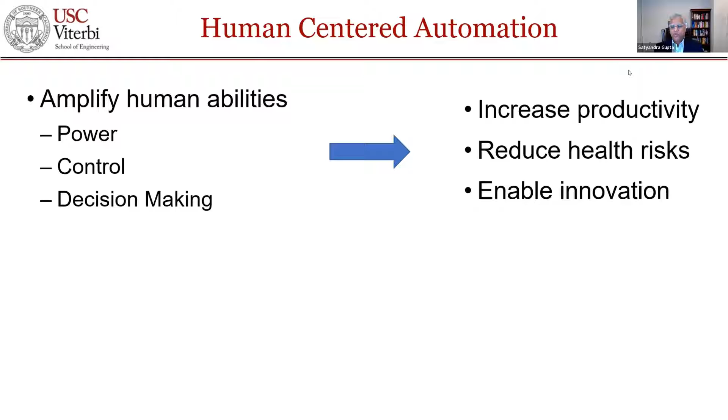So the field that I work in is basically called human-centered automation. The idea is that we want to use robotics and automation technology to amplify human abilities, in terms of power, control, and decision-making. If we can enhance human capabilities, then we can increase productivity, reduce health risks, and also enable innovation. So that's roughly the theme behind human-centered automation.

I believe that every problem can be solved with the right team, and we are now beginning to look at the following notion of team. We will have humans — we strongly believe humans are going to be a critical part of every team we imagine. Then there will be robotics, the hardware, which enables or makes humans more capable. And then there is the AI piece, which enhances humans' decision-making capabilities. So it's a combination of human, robots, and AI, which together can help improve quality of life for everyone. That's the vision with which we are working.

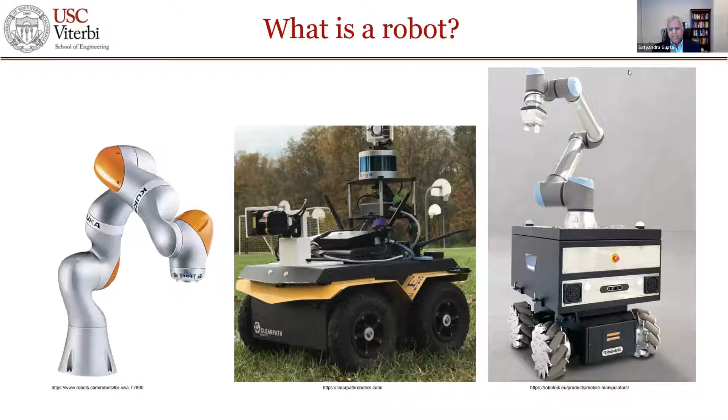So the first question I get asked is, what is a robot? In general, people would say there are two kinds of platforms out there traditionally called a robot. One would be a robotic arm, mounted on a table or some other workstation. Then there'll be a mobile platform, which may be carrying sensors and moving around. Increasingly, we see platforms where a robot arm is mounted on a moving platform. So this is what, in general, will be referred to as a robot.

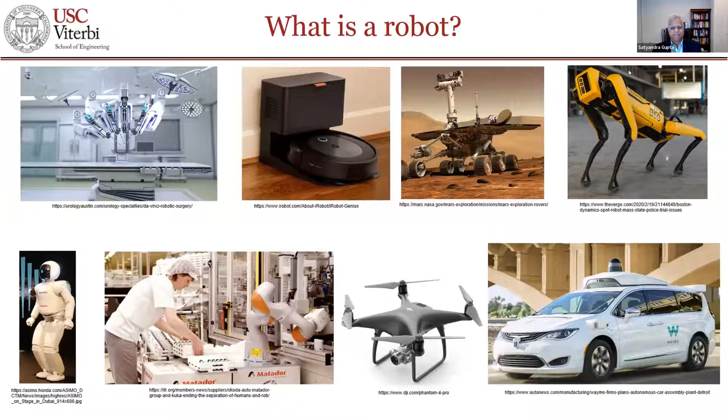Before I get into the main discussion point, I just wanted to show you some videos of the different kinds of robots which are built by my research group.

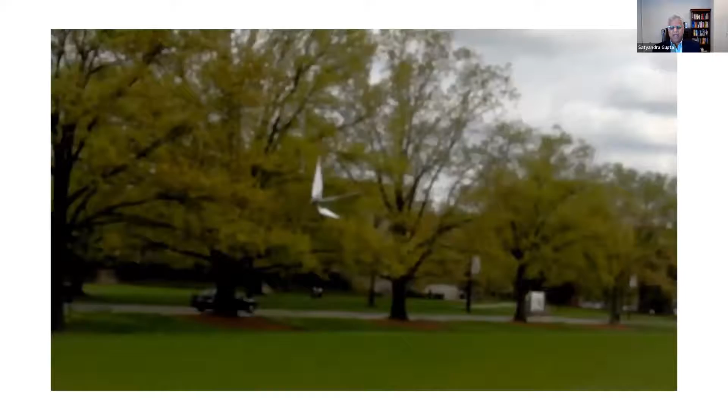The first robot I want to show you is this flapping wing robot. We got involved in building these flapping wing robots in 2005. The idea was that if you can build a platform which flies by flapping its wings, then you can have much quieter flight than what a rotary wing vehicle can provide. Also, these platforms are significantly more maneuverable, so you get much better performance than you get out of fixed wing flight. We have done lots of flapping wing platforms over the years.

We have also worked on robotic fishes. Here the idea is to build a small scale platform which can actually swim like a fish.

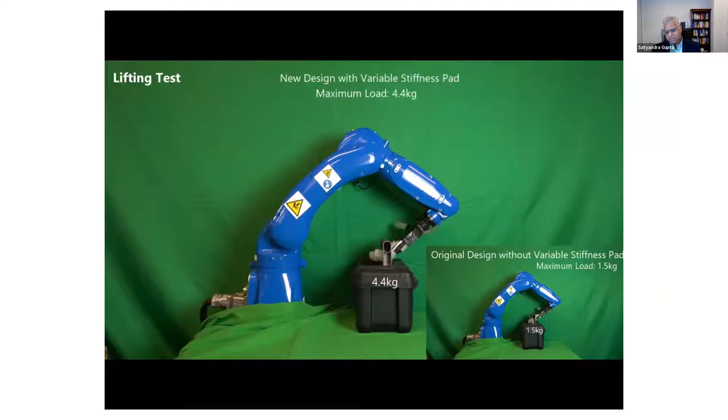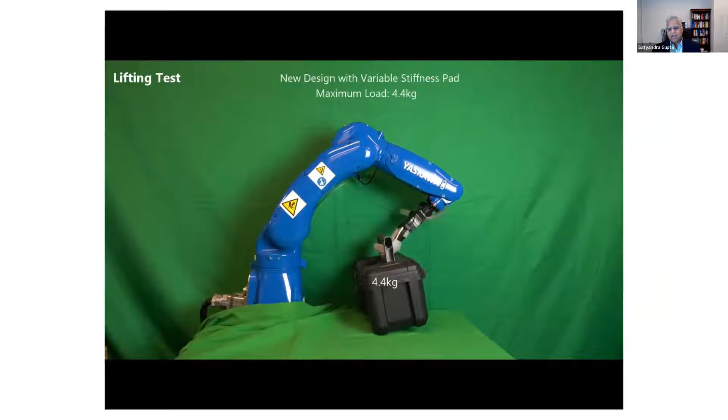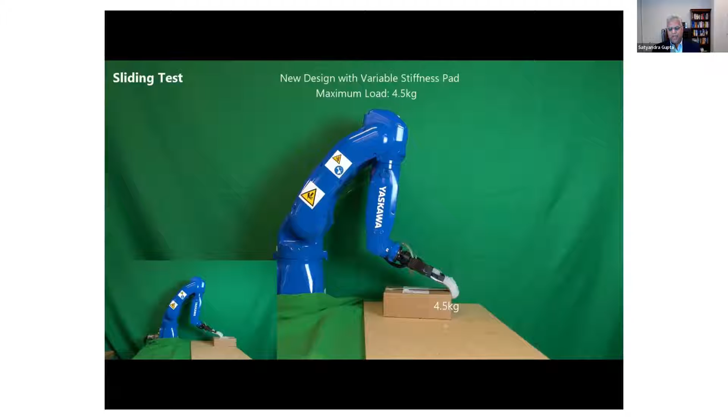We have done a lot of work in building robotic hands. The idea is that you're creating these robotic hands which can lift things up. In this case, the idea is to build a really low-cost hand using a technology called layer jamming, which allows us to change the stiffness of the fingers, allowing us to grasp the object safely. But when you need to lift it up, you can make the fingers very stiff, and therefore you can push things with force. So we've been doing a lot of that work.

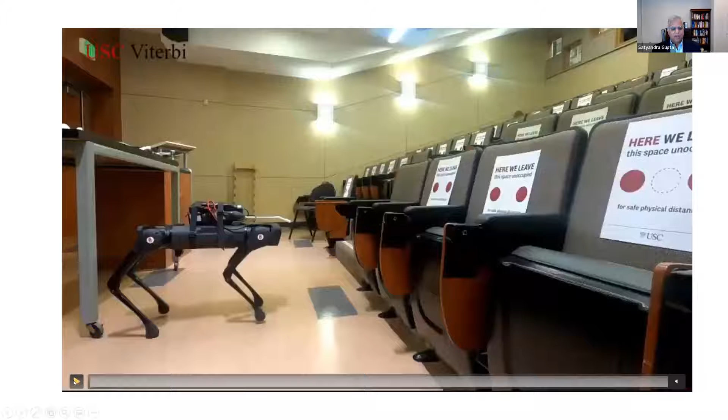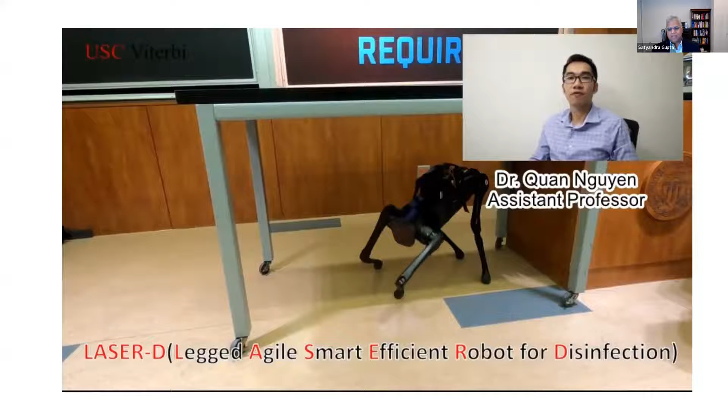We have also adopted a commercially available legged platform and put it to good use. This is work where we were looking into how we can do disinfection using these legged platforms. We got this commercially available legged robot and mounted it with chemical dispensing units, which allows us to walk around and spray chemicals. So that's another example of robotic work done in our lab. This technology has a camera, so when you spray, you can see what area is sprayed and what is not sprayed.

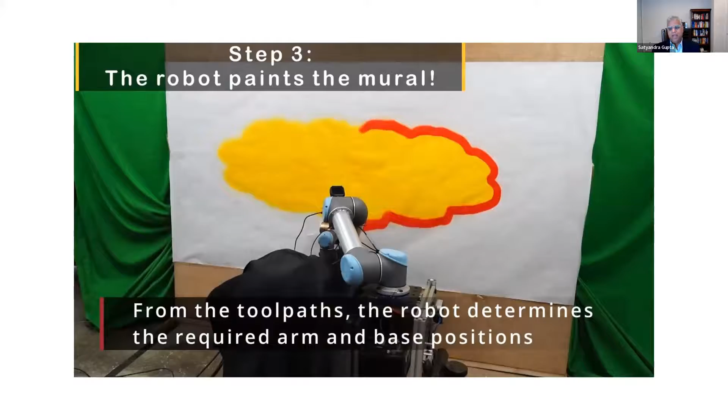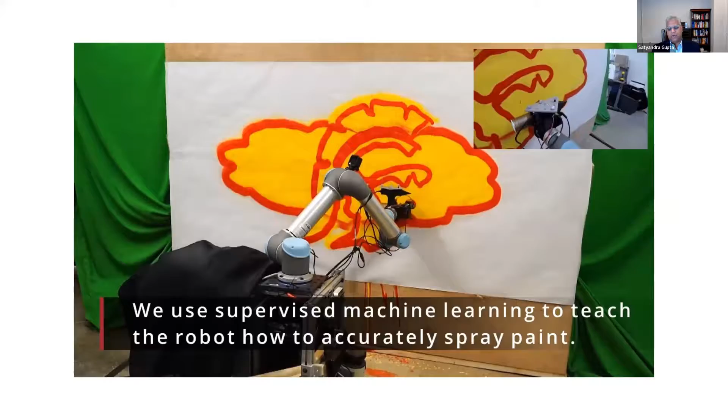We have also been doing some work in mobile manipulation. This is a technology where we're basically doing spray painting using robots. The idea is that a robotic arm mounted on a mobile platform carries a spray gun, and you can get the robot to start doing spray painting. So that's another kind of robot that we have worked on.

We have taken a robotic welder. There are lots of commercially available robots that can do welding. In our lab, we converted a robotic wire arc welding platform into actually doing 3D printing with the robot. You have seen plastic 3D printers where you can extrude plastic and print with that. Same idea, except in this case we are going to do 3D printing with metals, converting a robotic welder into a 3D printer.

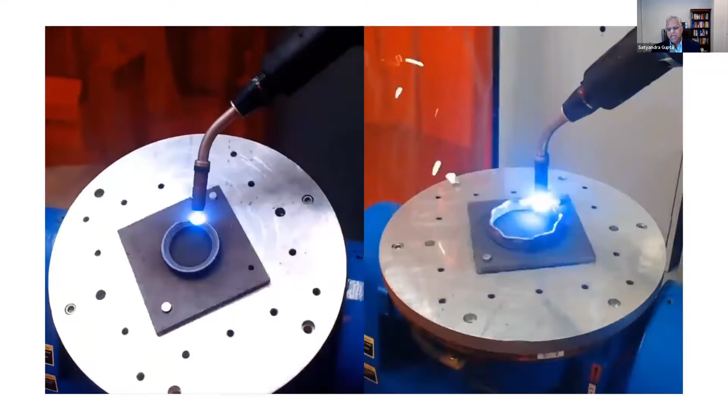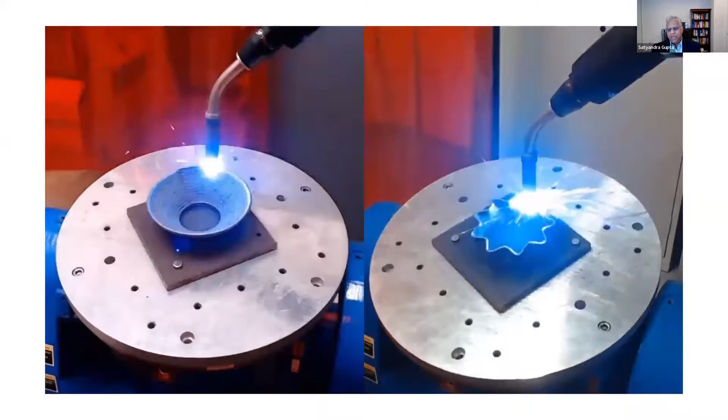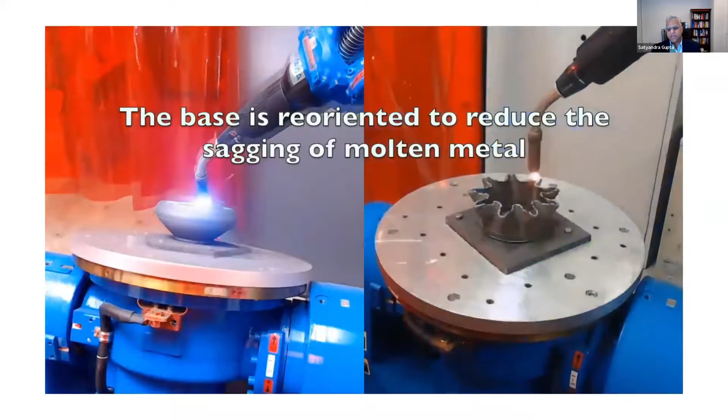In this case, we are printing with steel. Very similar idea: you layer by layer deposit material using an arc welding robot, and then you build the 3D structures. Any material that can be welded can be used in our system, and we can use that to create 3D metal shapes. So that's another example of using a robot in an interesting way, which we have done.

And now, if you don't like the roughness of this material, you can go ahead and do some light machining, which we have also done, and that can give you a very super smooth surface, and you can have a usable part.

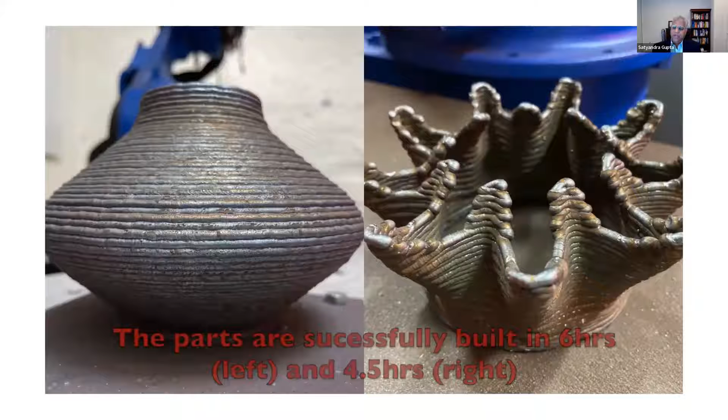We have also done a lot of work at very small scale robotics. Here basically we want to manipulate biological cells. These biological cells are 5 to 10 microns in size, so how do you manipulate them? If you want to manipulate a biological cell, how do you do that? You're not going to have a physical robot going and grabbing it.

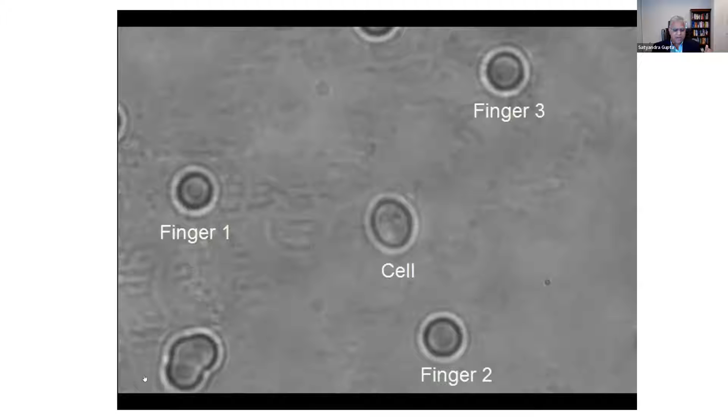So what you do is, in the fluid where the cells are floating, you insert some silica particles, and then you use a laser to manipulate those silica particles. Then you can use those silica particles as the fingers to manipulate the cell. In this case, we are able to grab the cell using these silica particles and move the cell around.

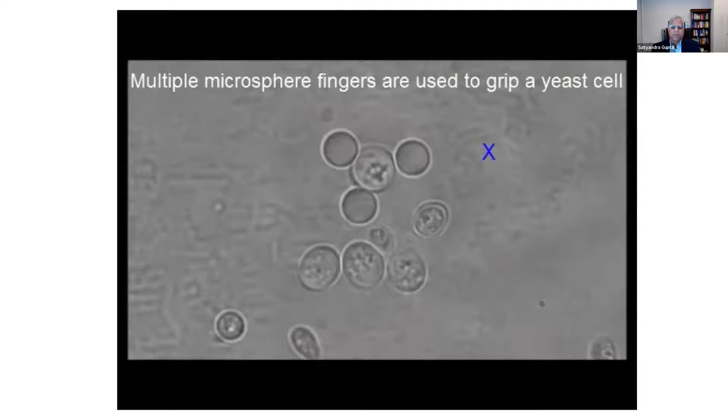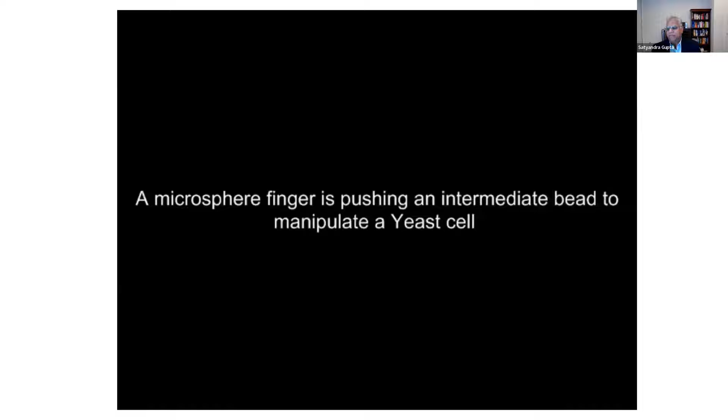We can position them. There's lots of interesting experiments where you want to study cell-cell signaling, cell-cell communication — this type of automation technology helps people in conducting those experiments. So this is just yet another example of robotics technology, but now the size scale is different.

A healthy human hair is supposed to be about 100 microns. So this is 20 times smaller than the width of the human hair. That's how small scale we are operating. So that gives you a good flavor of the kind of robot that we built.

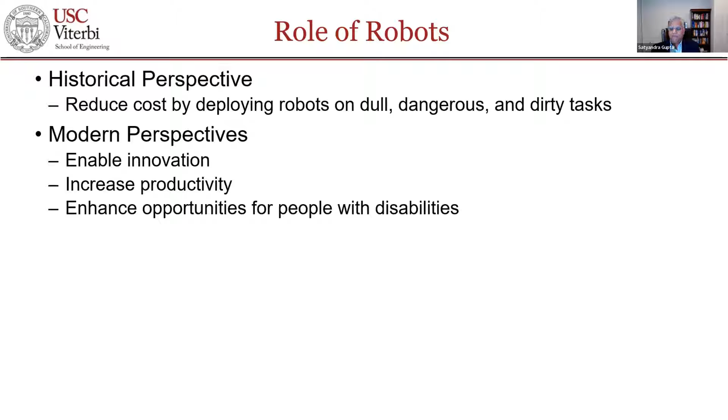Now I'm going to show you some applications where robots are being used, and then we can talk about the question of why we are not seeing more robots at home.

Robots certainly increase throughput, improve quality, and prevent injuries to humans in manufacturing settings. In lots of manufacturing applications, you will see robots being used, all the way from doing welding to performing material handling, assembly, or painting. You see these robots routinely in manufacturing applications.

A mid-sized robot arm costs about $50,000. Lower end, you can get one for $20,000, but a mid-size robot arm will cost about $50,000. That gives you some idea about the cost involved in just acquiring the hardware. If you put sensors on it and sophisticated AI software on it, that $50,000 acquisition cost turns into $150,000. So that's the cost of the robot in manufacturing applications.

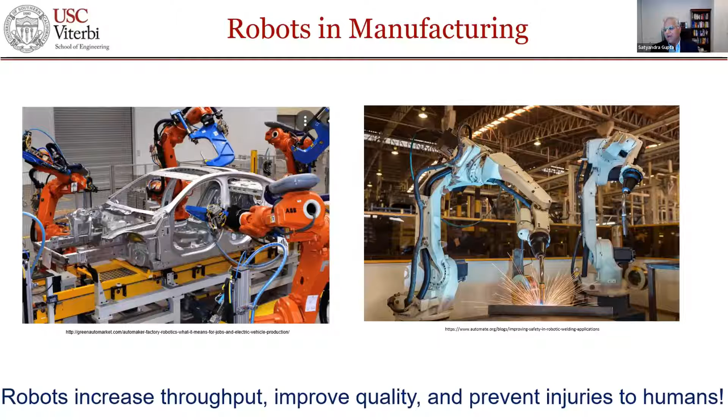This will be relevant information when I try to answer the question of when we are going to see robots at home.

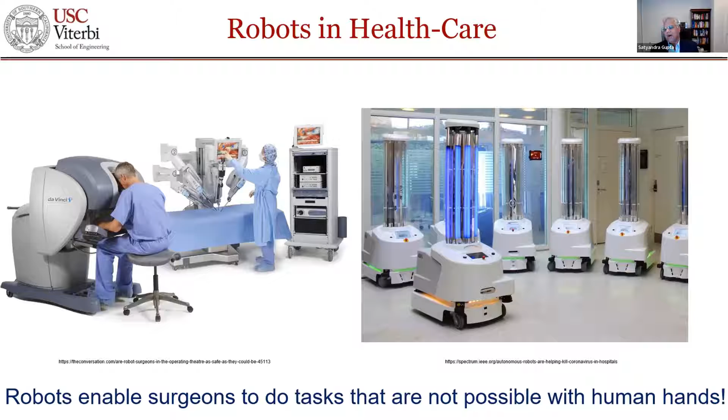Now robots are also becoming quite useful and popular in healthcare. On one hand, you have Da Vinci robots, which surgeons can use to do minimally invasive surgery. On the other hand, hospitals are beginning to deploy robots which can do autonomous disinfection using ultraviolet beams. Some of these Da Vinci type robots, used as assistants for surgeons, are very expensive - we are talking about millions of dollars. Very useful, but cost is quite high. You can train people to use the robot, and you can engineer the environment where these robots can be used.

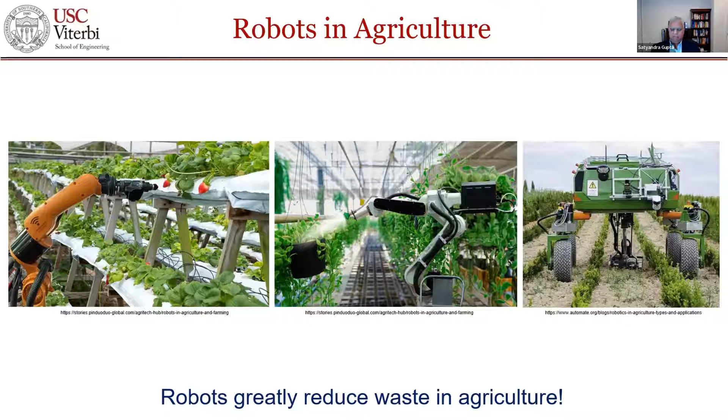Robots are also gaining popularity now in agriculture. People believe this would be a big application area for robotics, because robots can help do proper irrigation, pesticide application, and harvesting. There are lots of interesting things that can be done with robots, and they can greatly reduce waste in agriculture. The cost of these robots is comparable to the cost of robots in manufacturing - not as expensive as medical applications, but similar in price.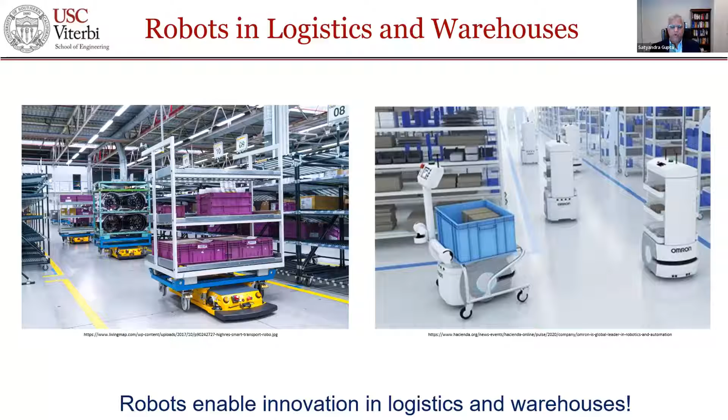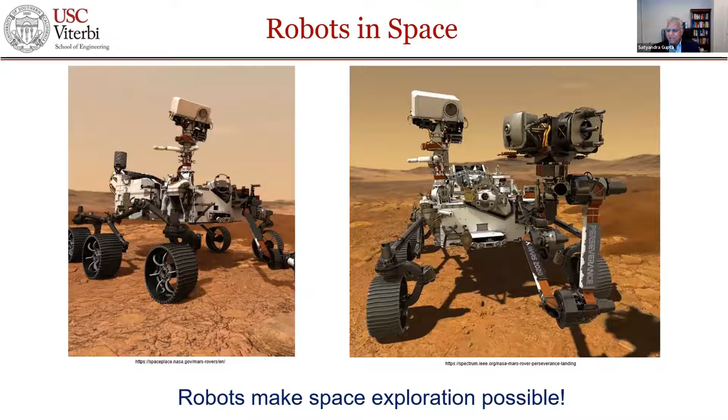Robots have been in space for a very long time. Obviously, without robots we would not be able to explore Mars with current technology. So the case for robots in space is obvious, and these things are super expensive - we are talking about really, really crazily expensive platforms.

There's tremendous interest nowadays in using robots in the field of assistive technologies, and people use this in two different ways. One way is robots that you wear on your body, which could be exoskeletons or prosthetic limbs. You also have social robots, which are robots in somehow humanoid form, which can interact with people. The reason for this is that robots are needed to restore functions in humans if humans have some loss of limbs.

As people are experiencing challenges with an aging population, in order to interact with people, there aren't that many people available who can fulfill that function, and therefore people are looking into robotics as a way of addressing that.

But these robots are currently potentially being thought about, being used in specialized facilities, and prosthetic things that you are going to be using are not going to be super intelligent. They are going to be very interesting mechanical or electromechanical devices, but they're not going to make any complex decisions.

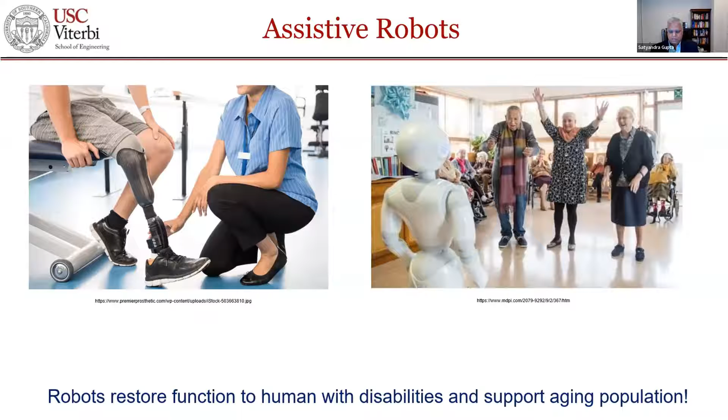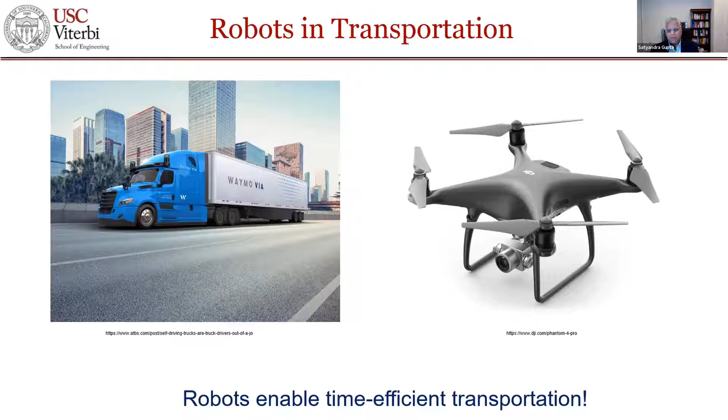Transportation, again, lots of people want to use robots. People have been talking about drones for deliveries in congested areas, and of course autonomous trucks for a while. So robots enable time-efficient transportation. If you can build the right kind of pipeline of appropriately chained robots, you can create a highly efficient transportation system.

People have been thinking about robots in food processing. So there are robots in restaurants where people are using robots to cook burgers, robots to make French fries. All kinds of interesting things are happening in that space. Robots also improve safety in food processing because during the pandemic, there were lots of restaurants struggling because if you have human workers making the food, you're concerned whether the food is going to be contaminated or not. Now, if you have a robot doing it, you're inherently not worried about contamination issues. So there's interest from that perspective in deploying robots. These robots are also comparable in cost to the robots you see in agriculture or the manufacturing sector.

Robots also get used quite a bit in scientific exploration. A robot can explore inhabitable spaces deep under the ocean where it's very risky for humans to go, or explore volcanoes where again it's not possible for humans to do it.

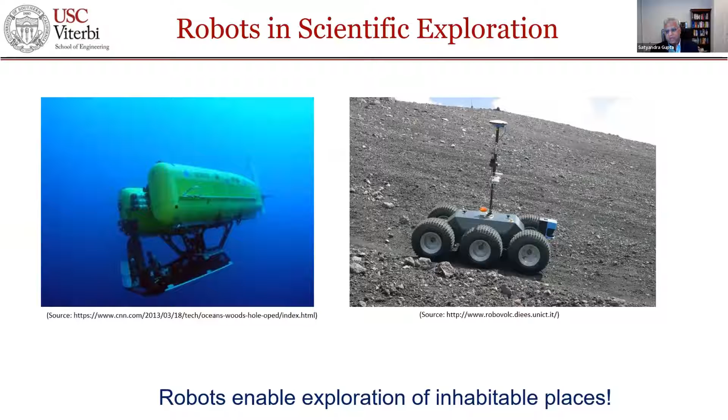Recently, we are seeing robots also being used in shops and grocery stores. People are talking about how we can reduce workers, since there are issues related to worker shortage, whether pandemic-induced or otherwise. Robots can take inventories, they can mop the floors, they can do a whole bunch of functions in shops and grocery stores.

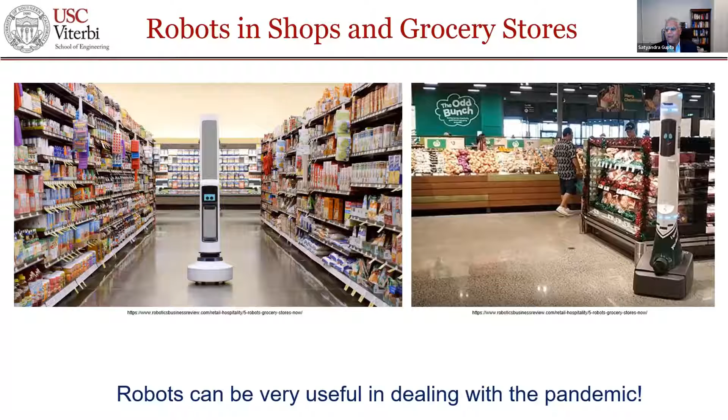So it's a good time to pause and then answer. Actually, let me just present one more slide, then I'll come back and answer this question.

Overall, robots are extreme machines and marvels of engineering. Robots on Mars have to endure extreme temperatures, and people have managed to build and design robots which can really endure extreme temperatures. Manufacturing robots have to operate 24/7 for 8 years with virtually no maintenance, so people know how to design those. Medical robots have to exhibit a very high level of reliability, and people know how to do that.

We can manipulate very, very small things using optical or magnetic fields. We have mastered the art of manipulating things which are invisible to the naked eye. So remarkable technology exists and it can do wonderful things. I highlighted for you many different applications where robots are currently being used.

So now the question is, why are we not seeing robots at home besides Roomba and some lawnmowers that you can purchase? The reason is the moment you start thinking about manipulating objects with a robotic arm, the complexity that comes with it increases the cost.

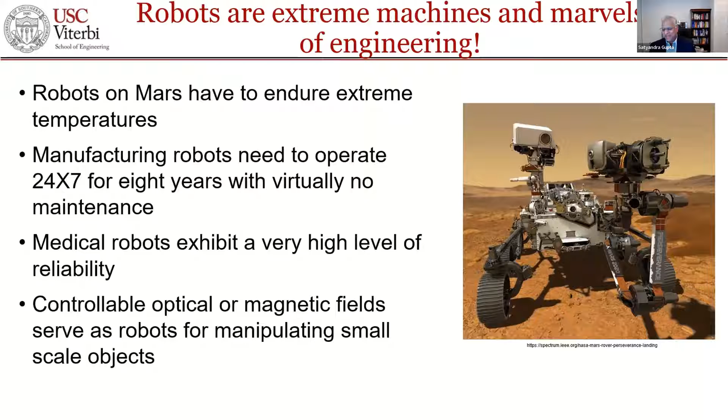So SK, I have a question. In terms of future, where are we looking at problems? Where do we need to fix things? Is it on the hardware side, on the mechanics, or is it on the software side, or other things? I have lots of slides for you, Vivek, in a few minutes. No problem.

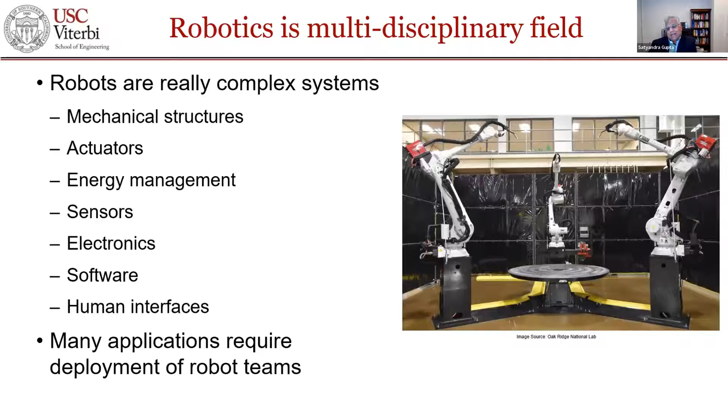Okay, so robotics is a multidisciplinary field. Robots are really complex systems. You have mechanical structures, actuators, energy management, sensors, electronics, software, human interfaces, and lots of applications use not one robot but a team of robots, and of course humans as well. So there's a lot of collaboration that needs to happen between different disciplines. And that now brings in the challenges. So I'm just going to try to answer Vivek's question.

Yes, robots can show some extremely impressive narrow feats, but when you think about what biological creatures can do, robots are nowhere close. So a lot of work needs to be done if we were to achieve that level of dexterity. And I'm not talking about intelligence, I'm just talking about dexterity, being able to manipulate the world. So a lot of work needs to be done.

Okay, so where are the problems? There are lots of open research problems in AI right now. We want robots that can program themselves, because a lot of manufacturing robots are manually coded up for what they're going to do. Not a sustainable model, as we move towards manufacturing where a lot of things are custom built. Robots need to adapt to changes by conducting experiments—if your sandpaper is wearing out, or somebody uses a slightly different material, the robot should be able to figure this out. Robots should also be able to ensure safety: if one sensor is busted, the robot should not break the part or itself, it should know the sensor is busted and get help. So lots of AI development needs to happen. This is one big open area.

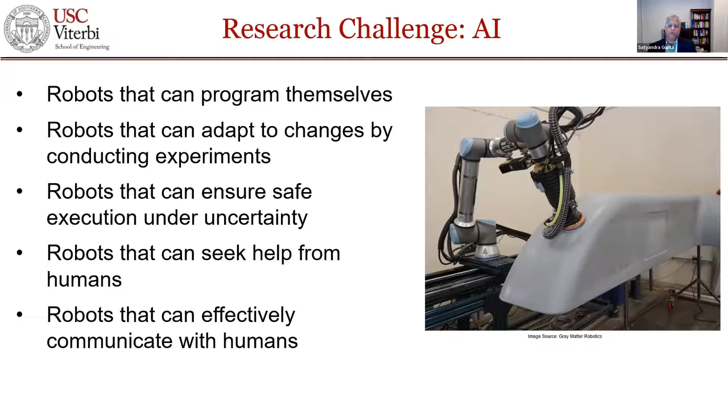So lots of room for people to do AI. Sensors—again, biological creatures have really exquisite sensing. Robots are beginning to use 3D vision, some force and torque sensing, tactile sensing, full body robotic skin. These are all different technologies people have been talking about, but they're in very, very early days. In order for them to become really powerful, a lot more work needs to be done in this field—getting anything close to human vision, or how sensitive tactile sensing is for humans, requires a lot of work.

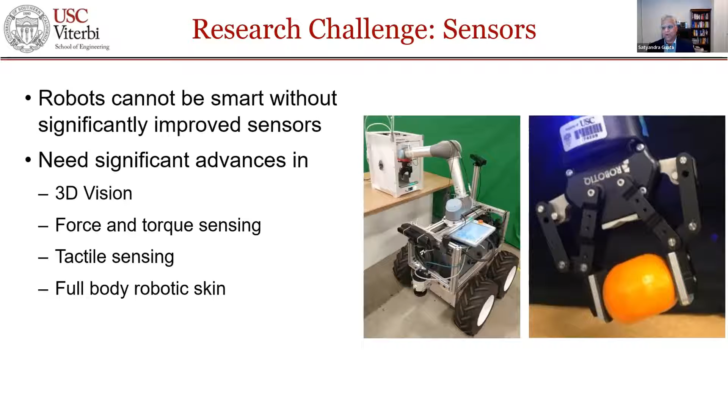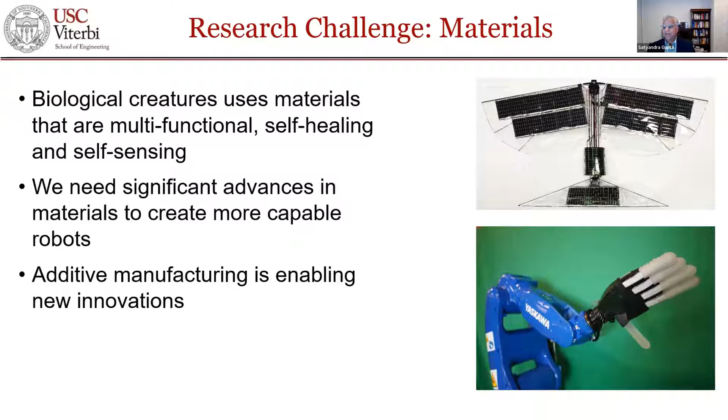Materials—again, biological creatures are made from multifunctional, self-healing, self-sensing materials. Robots are largely made out of dumb materials. That means if you want to impart these capabilities to robots, it's very challenging right now. A lot more work needs to happen in that space.

Actuators—robots are largely using electrical motors. If you take a look at biological creatures, all of them are powered by muscles, and muscles have some amazing properties. So we need to shift focus away from electrical motors to more artificial muscles. Work is happening in that area, but a lot more needs to be done.

Human interfaces—right now when people interact with robots, it's very frustrating, because we're pushing buttons on a teach pendant or typing something into a computer. We really need to figure out different ways of interacting with robots. People are beginning to talk about augmented reality, and that might be part of the answer, but a lot more needs to happen in the interface space. People are also talking about just using speech to work with the robot, but speech alone, in my opinion, is not going to be the answer. It'll be some combination of speech, augmented reality, and all sorts of other things, which will eventually allow humans to interface with robots in a much more meaningful way.

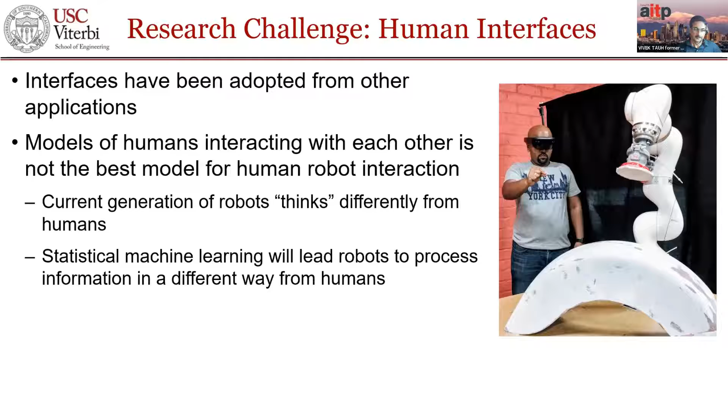Neelu asked me to say something about educational opportunities in this space. Right now there are lots of opportunities available. People can do an MS in engineering where you can specialize in robotics, or there are MS programs available in robotics. There's a PhD in engineering you can do with a specialization in robotics, or you can do a PhD in robotics. You can do BS in robotics. So lots of educational opportunities are available for people.

There's a question from Elizabeth about, but what about the AI technologies and systems? Do you want to give a little bit more context behind your question, Elizabeth, then I can answer it? Okay, alright, sounds good.

Okay, so let me try to get to the AI part of it. Most of my current work at University of Southern California is focused on basically AI for building smart robotic assistants. So just to get a little bit of context, today's industrial robots are physically capable of doing lots of things.

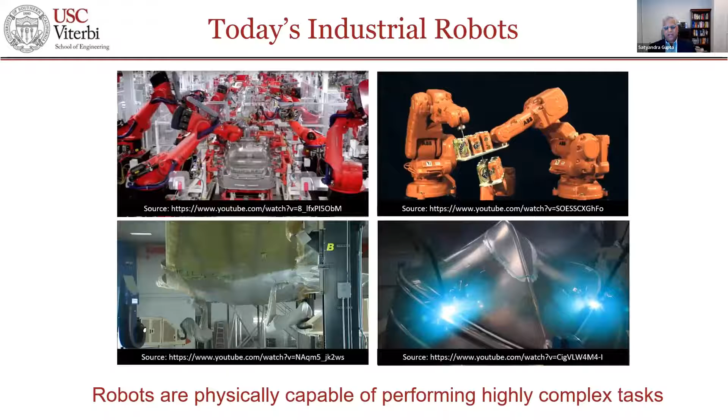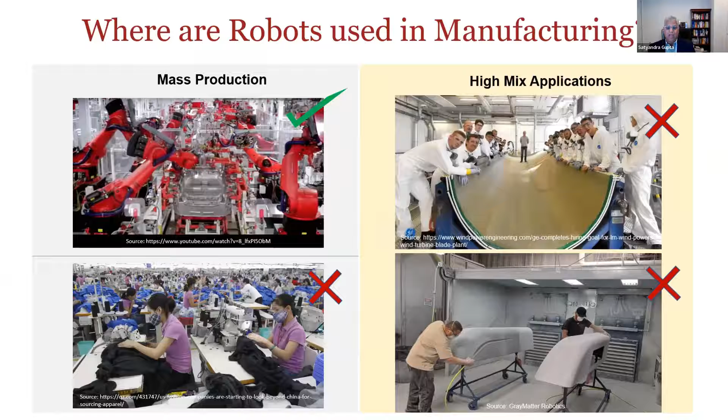But if you think about it, go to manufacturing companies in the US and see where robots are being used. Robots are used a lot in car companies in the automotive sector, and robots are used quite a bit in electronics companies. But if you go to lots of aerospace companies and lots of other places, you don't see that many robots. What's the reason for it?

Actually, before getting to the reason, that means that if you go to these companies, humans are doing these things today. If you go to a manufacturing company around LA, you will see lots of humans doing these things, which they should not be doing, because this poses health risks for them. Why are humans doing this?

The way robots get used without AI - without AI, a robot is just a machine. So if you have a new task, it will take significant time to configure a robotic cell. You will need a human expert to come program the robot, and the robot will just repeat the motion which has been programmed. You're not going to be having intelligence. And if an error were to happen, it's going to take a long time to recover from it.

That means the only people who use robots are the ones doing mass production. So if you're a car maker or electronics part maker, you use robots because you program it, run the line for a year, and everything works well - even though it took you two weeks to set up a line. But if you're not doing mass production, using robots becomes very, very challenging. And that's the reason why in the US, there are 2.5 robots for every 100 workers. Most people find that number shocking - they'd guess we'd have as many robots as human workers, but the number is 2.5%.

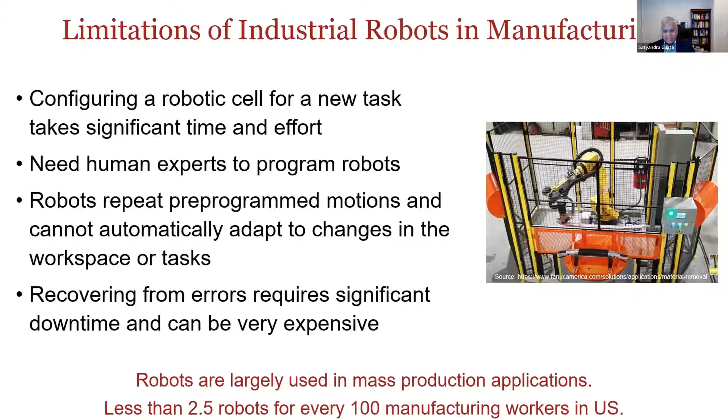And the reason for it is that robots are dumb, the ones which people are using in industry. They just repeat the pre-programmed motion. Now what's beginning to happen is there are lots of advances in robotics, new sensing modalities, new robot configurations, new control modalities. So now people are talking about using really advanced AI to power the robot, as opposed to just programming the robot and using it as a programmable machine.

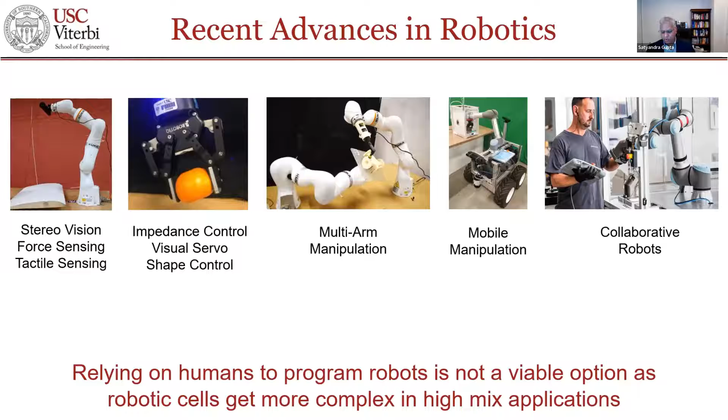So AI is needed for 5 things. Number 1, we don't want humans to go program the robot. So if you have a part that needs to be sanded by the robot, all you should be able to do is tell the robot, sand this part. You don't want to go program low-level motion saying move angle 1 to 36 degrees, move angle 2 to 38 degrees. You just want to tell the robot, here's the part, sand it.

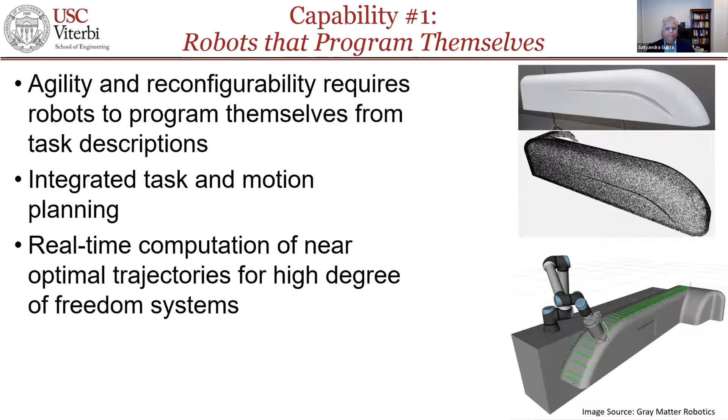That needs AI. Then, if you have a new material that the robot needs to sand, you should tell the robot to do its own experiment using self-supervised learning. Figure it out, what works, what doesn't work. And then once you've figured it out, the parameters, go finish the task. I don't have time to go back and tell you how to sand it. Another human would do the same thing. If I tell another human to sand this part, they'll figure it out, do some experiment on some corner of the part, and figure out the right setting. So self-supervised learning is an integral part of creating this robot.

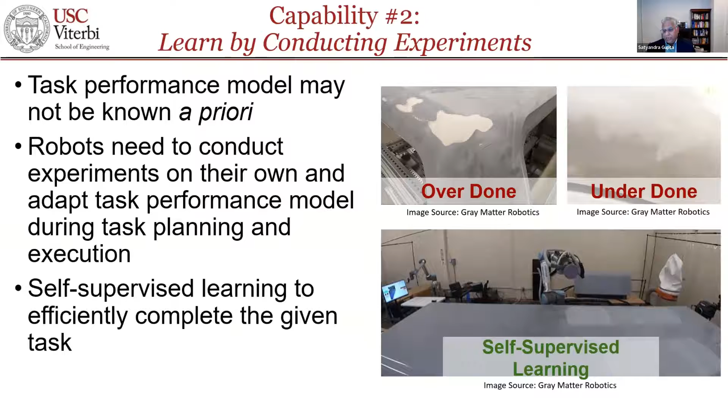Then safety. For example, if your sensor is not working well, you have a blurry vision, you don't want to go ahead and start executing motion and cause damage in the world. You really want to make sure you can estimate what uncertainties are there and manage it to make sure you don't cause any harm. And again, you need AI for that, real intelligent control to make sure you don't cause any damage.

Things will fail. Sometimes the robot will not be able to do the task it's assigned. Rather than creating a mess or simply stopping, the robot should have introspection capability, again AI technology, where it's going to go ask a human, hey, I'm stuck here, or I have very low confidence of finishing this task, please come and help me. So again, AI is needed.

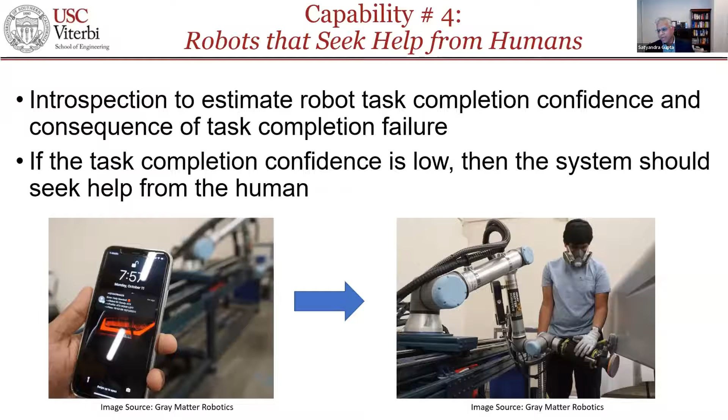Fifth capability: if a robot has to communicate with a human, then you need AI. Because the way previous generations of robots were communicating with humans was just a data dump, where the robot says I'll dump all the data that's there. It's not going to help any human, except somebody with a PhD in robotics. So you really need AI to manage the communication between human and robot, so the robot can tell a human in an intelligent way: here is the problem, here is maybe the relevant data, here is what I'm seeing, help me. So again, AI is needed.

So to summarize, the 5 roles that AI plays, and that's what we're developing right now: make sure robot can program itself, make sure robot can use self-supervised learning to conduct its own experiments, make sure it has intelligent control which will not cause damage or hurt the robot, tool, part, or surrounding humans, do introspection whenever confidence is low or it's stuck and ask humans for help, and use AI to effectively communicate with the human. That's the 5 major AI pieces being worked on by my group and lots of other people.

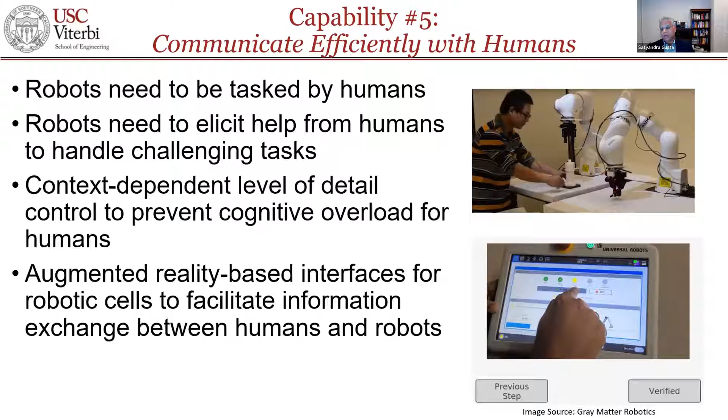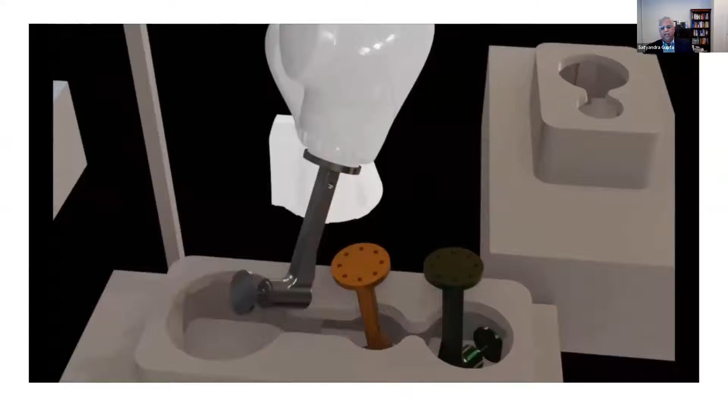This shows you AI capability where robots are able to generate motion plans automatically. There's nobody programming the robot. You're giving tasks to the robot, and the robot is figuring out how it can move from one location to the other in a highly confined world by itself.

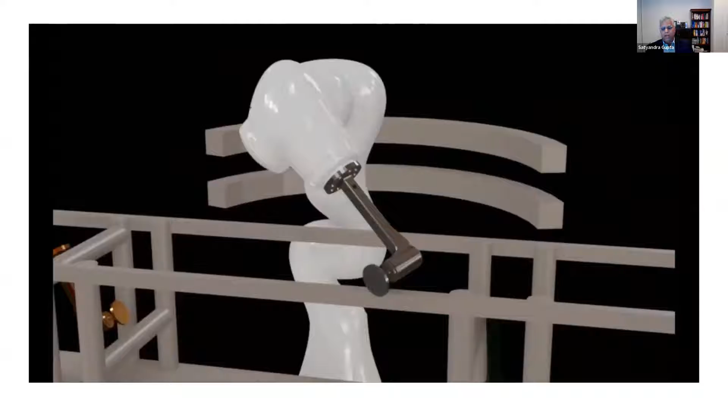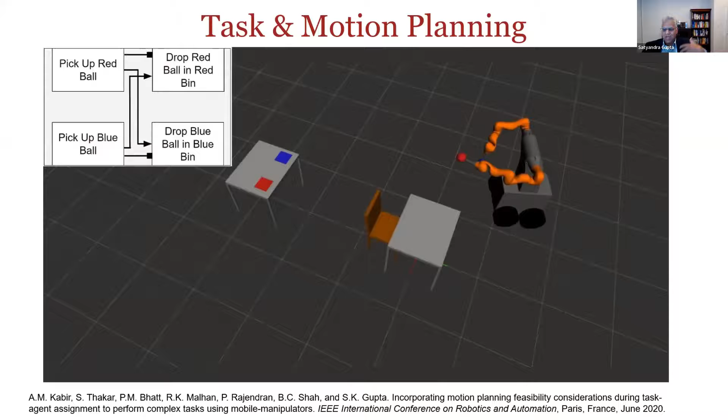Again, the same things. In this case, these are some very challenging tasks the robot needs to perform, following contoured surfaces, and the robot is able to do that. In this case, these are robots that figure out which arm to use for which task, so it can do assignment, saying the left arm will do this task, the right arm will do that task, that's how I'm going to move. So all of this is now being powered by AI.

We work in the lab, lots of interesting, exciting applications.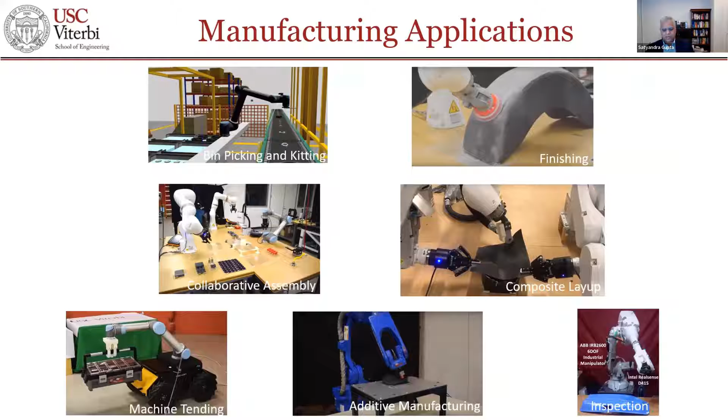In the interest of time, considering I want to cover a few other topics, I'll just show you one more video. This is a video where a robot is inspecting a really complex contoured surface, and it will build a really good map. This is technology used in inspection.

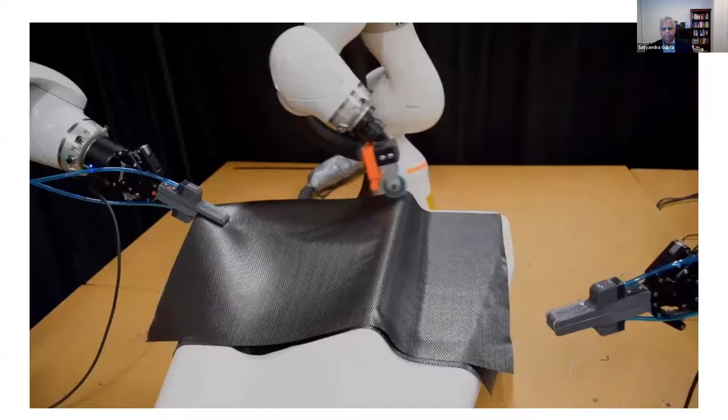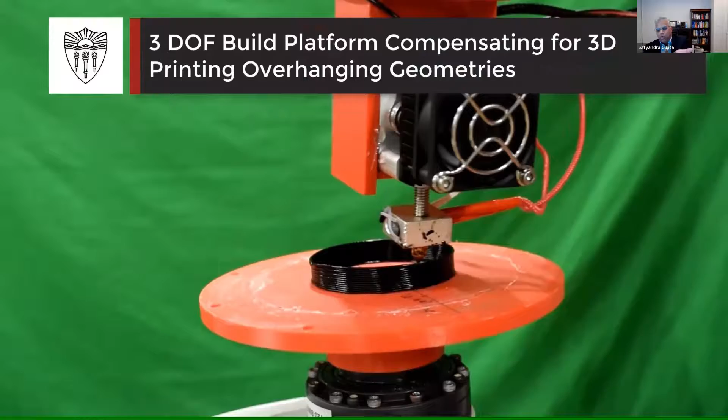Lots of other videos, actually this one also you might find interesting. Here a robot is doing 3D printing, but typical plastic part 3D printing, if you have an overhang structure, you have to print a lot of support material. In this case, there are two collaborating robots doing the printing. One robot is holding the base, the other is doing the printing, and both move in a synchronized manner so no support structure printing is needed. Therefore, you can now print all kinds of interesting structures which after printing do not require any more finishing operations. Lots of exciting things beginning to happen in these application areas.

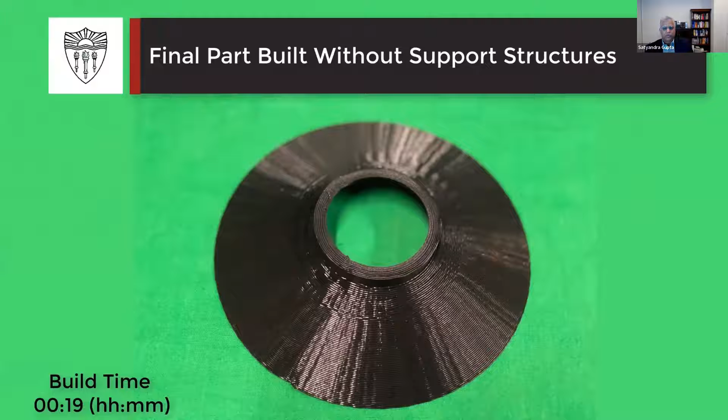These are all videos from my lab, basically. So there's lots of exciting things happening in this space.

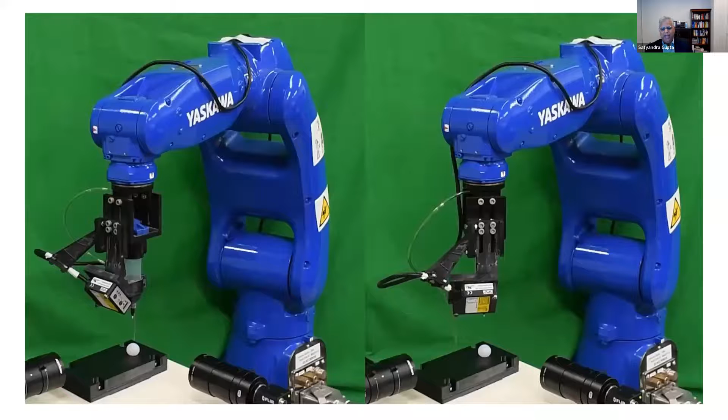This is printing at a very, very small scale, where we can do printing at an extremely small scale. Some more work on wire.

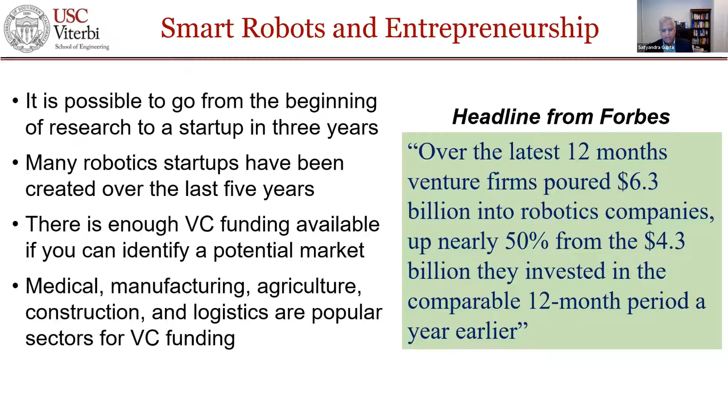Now the final topic I want to cover is basically startups. As I mentioned, I'm a professor at University of Southern California. Right now there's tremendous interest from the VC community to invest in robotics companies, with lots of exciting things happening in medical, manufacturing, agriculture, construction, and logistics space. I co-founded a company with a couple of my students in January 2020.

We raised a 20 million Series A round a couple of weeks ago. Our company is focused on robotic sanding and surface finishing applications. Currently, millions of people land up working in surface finishing tasks, which they shouldn't, because you're wearing a respirator and moving a tool which is vibrating, which causes all kinds of problems. So we use advanced AI and sensors to give robots new capability.

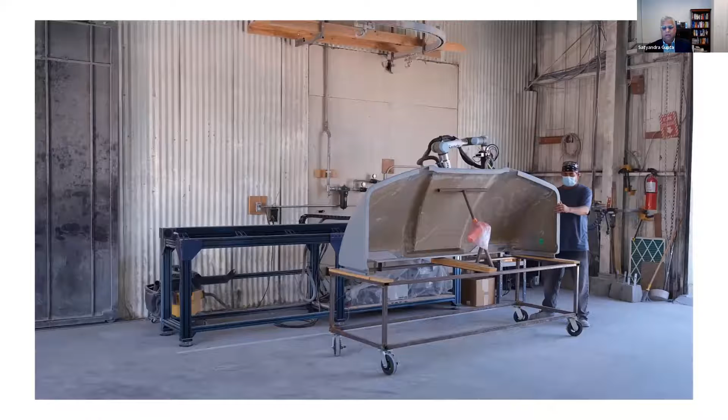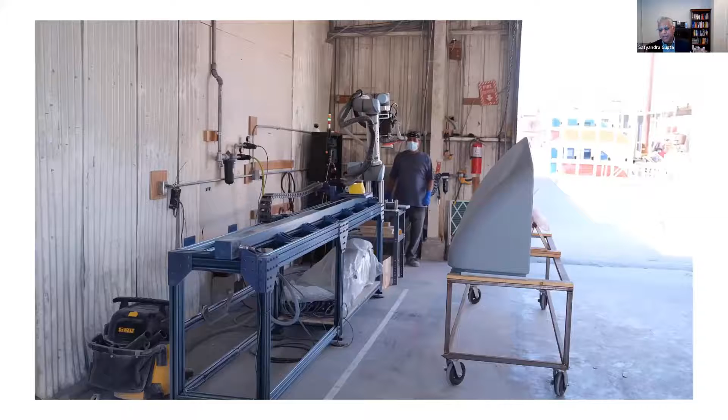This video shows how the technology works. A worker brings the part in front of the robot, secures the cart, presses a button, and walks away. The robot will scan the part, build its 3D model, figure out how to sand it, and then go ahead and sand it. That's how this particular technology works.

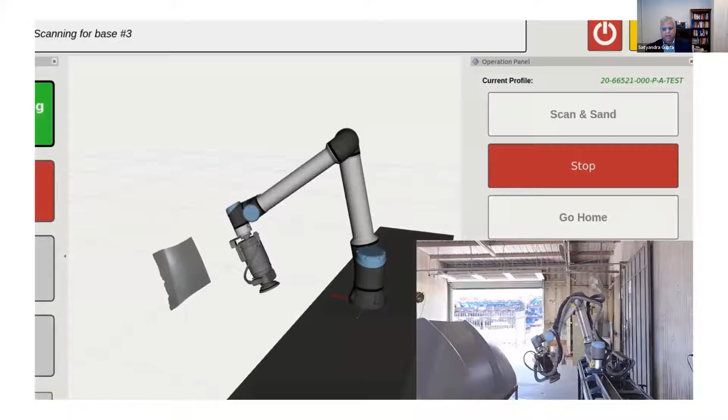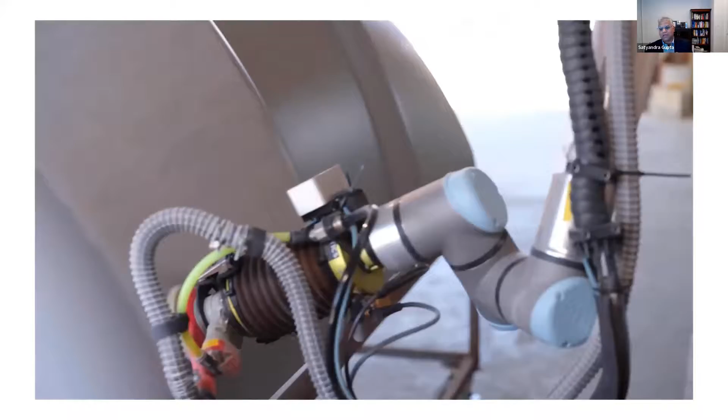This is right now just scanning the part so it can build a 3D model of the part. Then it has generated the path it's going to use to sand it. Once it has the path, it's simulating it ahead to see if it works or not, and then it starts sanding it. So now it's sanding the part.

This shows that this type of technology can do some interesting edge sanding. It's not just flat regions that it can handle; it can also do sanding on these edge type of things.

Now, other pieces: there's tremendous societal anxiety about robots. Many people are afraid of robots. They think robots will take away jobs, or that robots will somehow kill all humans. In my opinion, there's no basis for robophobia. Data indicates that robots help in increasing employment. Wherever people have used more robots, employment pictures have looked good.

Robots today work on human-prescribed goals. You task the robot to do tasks, that's what a robot does. A robot doesn't have its own agenda or its own goal; you give it the goal and it works on that goal. So if humans use robots in a responsible way, robots are not going to cause harm to humanity. If a human uses a robot in an irresponsible way, obviously it's going to lead to bad outcomes. That's kind of how things look today to me.

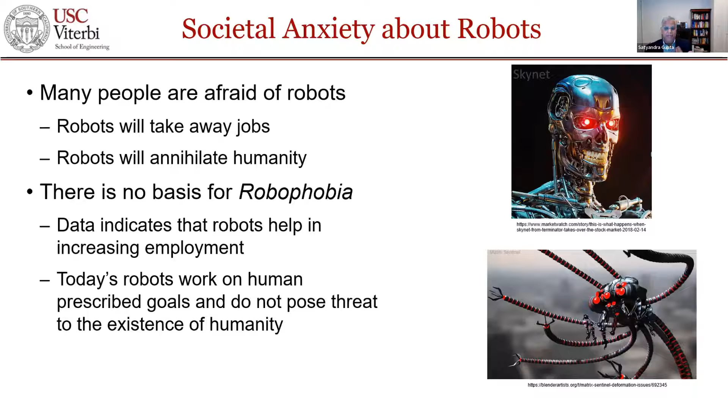For people who want to work in this field, it's rapidly changing. The US, unfortunately, is not a leader in the field of robotics and automation. South Korea, Japan, Germany, and Sweden are significantly ahead of the US. But people who want to work in this field need to commit to lifelong learning. Things are changing super fast, and it's a multidisciplinary field.

So you need to get lots of perspective. It's not just a software problem, it's not just a hardware problem. I mean, my appointment at USC is between the School of Computer Science and Mechanical Engineering, so I'm a half computer scientist, half mechanical engineer.

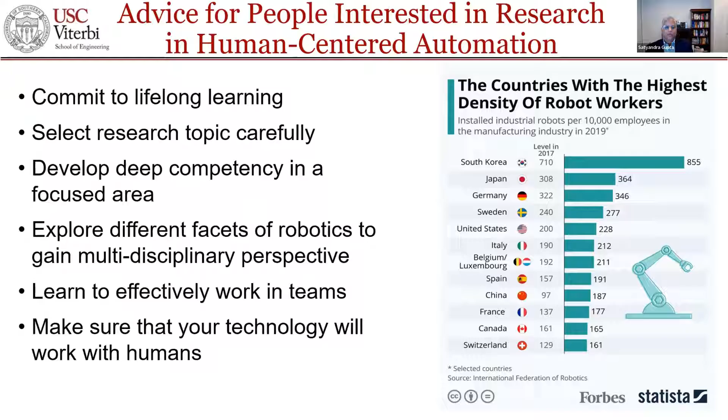And final piece of advice is human first. So we have to always make sure that when we are developing technology, how it's going to impact how humans are going to use the technology. That's kind of my advice for people who want to work in this area.

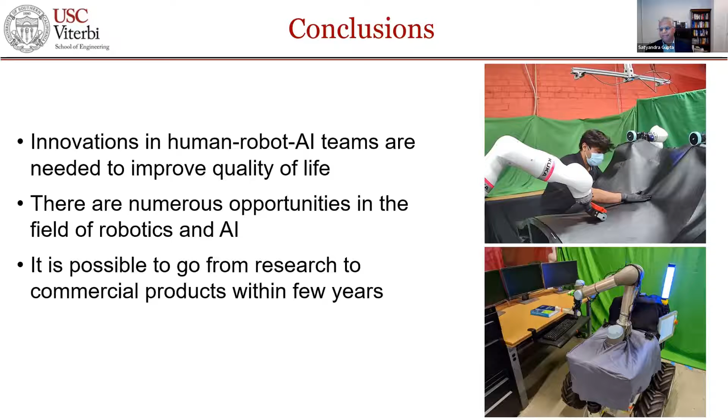So in conclusion, innovations in human robot AI teams are needed to improve quality of life. There are numerous opportunities in the field of robotics and AI, and it is possible nowadays to go from research to commercial product within a few years. So with that, I'm going to stop and answer any final questions that you may have.

Regarding Gray Matter Robotics, it seems to me that a lot of the focus seems to be the software side, because you guys are using a UR5 robotic arm. Did you guys have to face any mechanical engineering challenges at Gray Matter Robotics? For instance, perhaps you needed to make a custom end effector for the sanding.

So Gray Matter, you correctly said, largely focused on software. We try to not do too much mechanical engineering. Wherever possible, we try to get commercial off-the-shelf things. We make most of our contributions in the space of software. But if needed, we do that, right? So it's not that we are opposed to doing mechanical engineering work, it's just that the company's main core is AI. And whenever possible, we try to work with commercial off-the-shelf hardware. If needed, then we do some small, modest amount of work in that hardware side.

I have a question around security, and I'm wondering what considerations that your company or anything you've been involved with have had around security in terms of securing the AI models or the network interfaces for any robots that would need to be connected to Wi-Fi or cellular, things on that level?